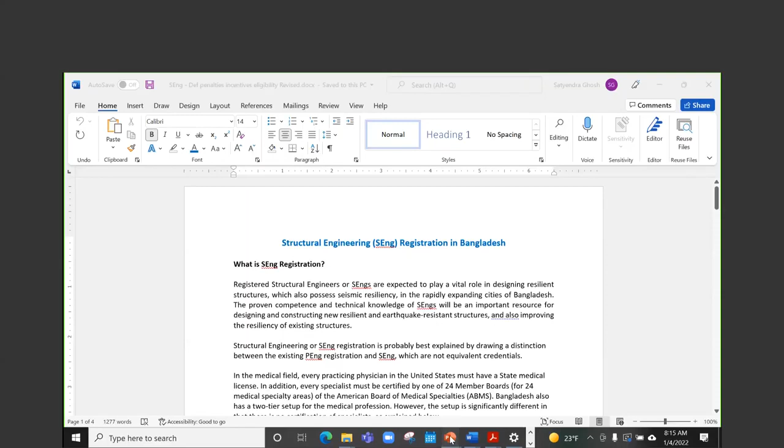So we have a two-part presentation today. The first part is just a general introduction to building codes. We thought that that would be an appropriate beginning to the whole program.

Dr. Ghosh, you're not on the slideshow mode, presenter mode. Oh yeah, okay.

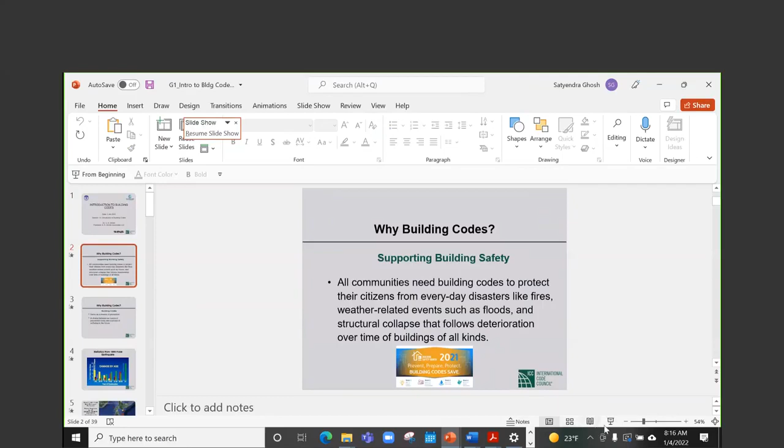Yeah. The first question is, we are spending a whole lot of resources and effort in trying to get BNBC 2020 implemented first and then enforced. But why? What is the importance of building codes? Why building codes? So this is very basic. All communities need building codes to protect their citizens from everyday disasters like fires, weather-related events such as floods, and structural collapse that follows deterioration over time of buildings of all kinds.

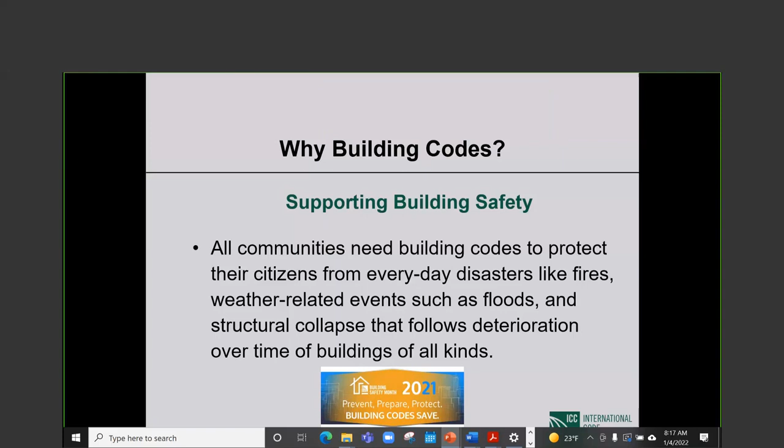Okay, so protect citizens from everyday disasters, protect citizens from disasters that happen once in a while, like floods, and age-related deterioration ultimately will destroy any structure. And to the extent that we can take steps to preserve structures to prolong their life, that also belongs in building codes. Building codes serve as a means of prevention. In a very basic sense, building codes prescribe preventive measures to keep bad things from happening. It provides us with a choice between an ounce of prevention today and a pound of suffering in the future.

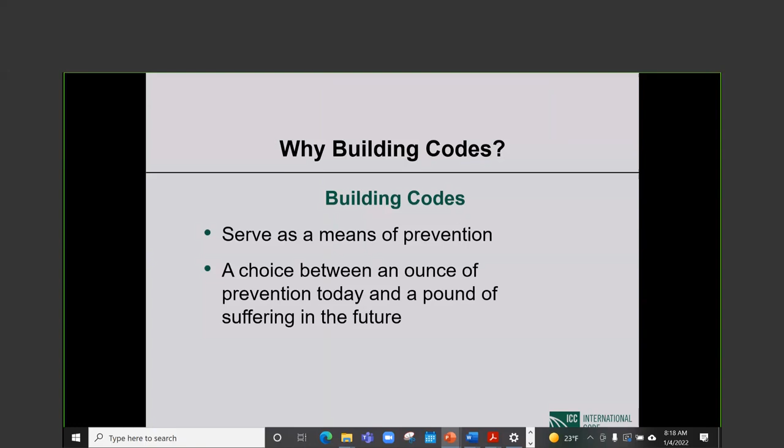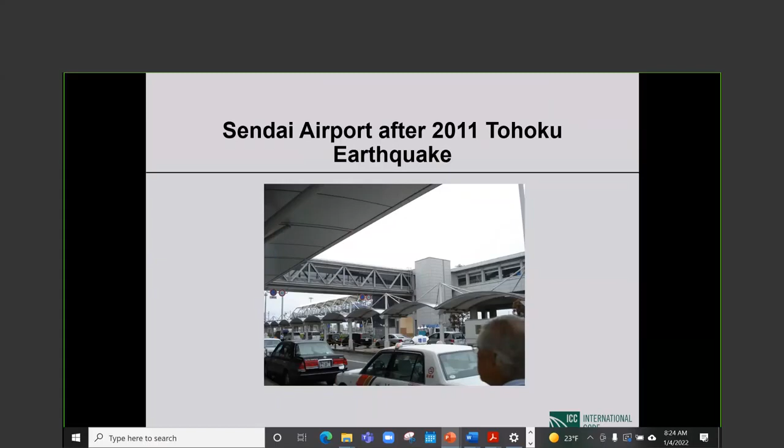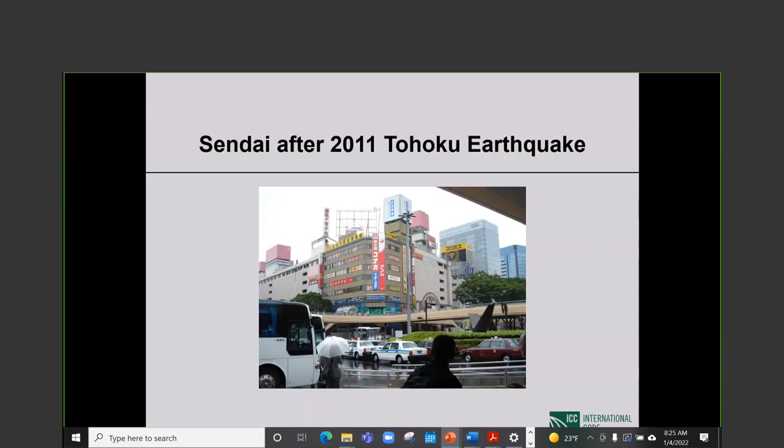It was not damage free, but considering the magnitude of the earthquake, the damage was very light indeed. When we came out of the airport waiting to be picked up, this is what the city looked like. You look at the traffic. There was essentially no sign of an earthquake having taken place just 3 or 4 weeks before. If you looked hard, yeah, there were signs, but there was basically not a whole lot to see. So I'm not saying that there was no damage, but if you drove around the city, you might not see a whole lot until somebody pointed things out to you. And then you did see earthquake damage.

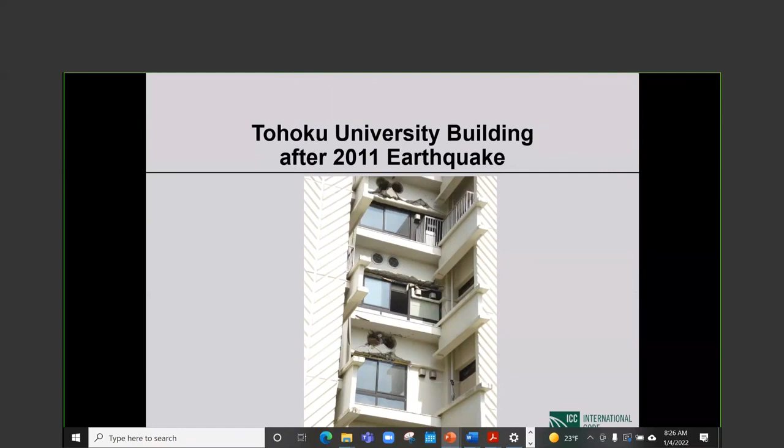Now, we were taken to the campus of Tohoku University just outside of Sendai, and many of the university buildings were old. This is one of them. These are shear walls that are coupled, as you will see in the next picture. These coupling beams between the shear walls had openings for some reason. I do not know why. And those suffered pretty much as expected, very major, very substantive damage.

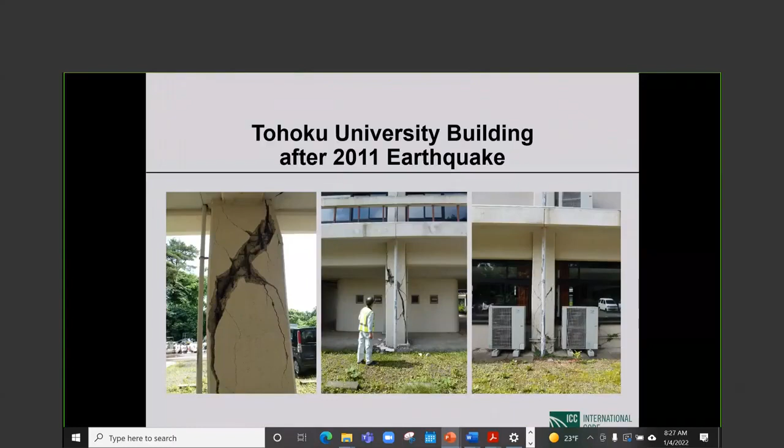So in this older building, there was plenty of damage to be seen, but as I mentioned, buildings designed and built by the later codes did incredibly better.

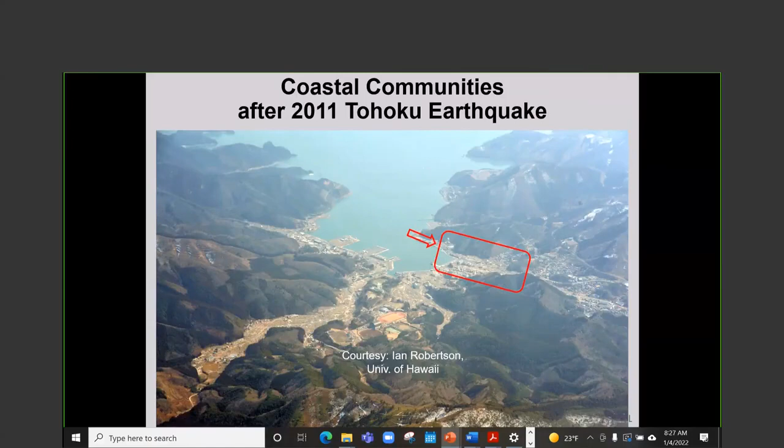The tsunami was a totally different story. All the coastal communities were fishing villages or fishing towns, and this is one of them. I don't remember the name now, Onagawa, something like that. You went to any of these places, and we went to many. It really is very depressing even to watch. All you saw was an occasional concrete building still standing up. When I say building, it is the skeleton of the building. Everything else is gone.

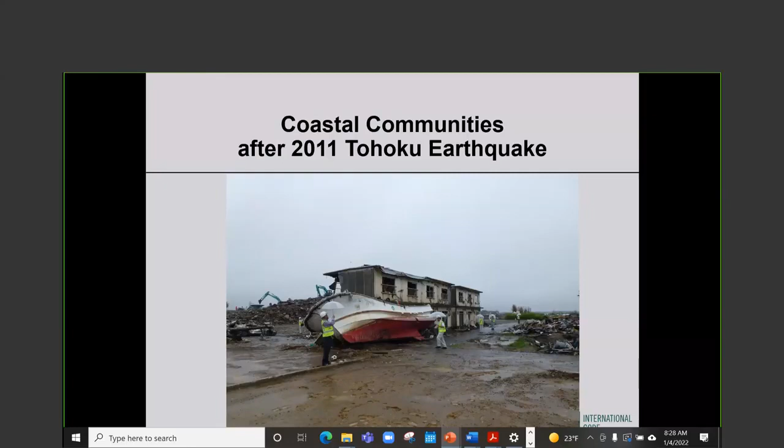People's possessions are all over the place. Children's shoes, family photographs, clothes. Typically they were collected in heaps, and other than some workers, there was no one around. It was total, complete devastation. In stark contrast with what happened as a direct result of the earthquake. So tsunami is a different story. We will not go into that today.

But my point in showing you everything so far was that Japanese building codes are technically sound. Much more importantly, they are very strictly enforced, and as a result of that, I would say all post-1981 structures, particularly post-1991 structures, have performed very, very satisfactorily in recent Japanese earthquakes.

Earthquake threat is not taken seriously in Bangladesh, at least by the public, although the World Bank seems to be very aware that it exists and that it may cause very, very serious problems. And it is true. I think many of you in Dhaka felt an earthquake about a month ago, this particular earthquake of magnitude 6.2 that originated outside of Bangladesh in Burma.

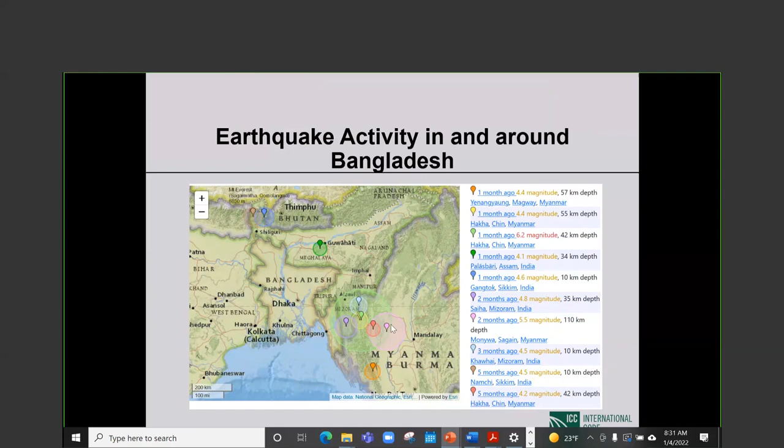and the epicenter is far enough away, at least from Dhaka, not from the border of Bangladesh, but a larger earthquake closer in, you can easily appreciate, might cause much more severe consequences. Earthquakes are natural disasters. The disaster that really has haunted the public in Dhaka and in Bangladesh is the man-made hazard of fires.

I will mention only two: the Chawkbazar fire of 20th of February, 2019 was the year. This is what happened. A fire, and much of these things should not happen. That's the point. A fire started as a result of a road accident of all things between a pickup van and a private car. After the collision, a gas cylinder stored in the private car exploded.

The first place the flames hit was a chemical warehouse on the ground floor of a 5-story building, and the flames quickly spread through 4 other buildings, including a community center where a wedding party was on. The fire left at least 80 people dead and 50 others injured. So imagine this is a chemical warehouse on the ground floor of a building where people live in a congested neighborhood. This definitely is not permitted by any code.

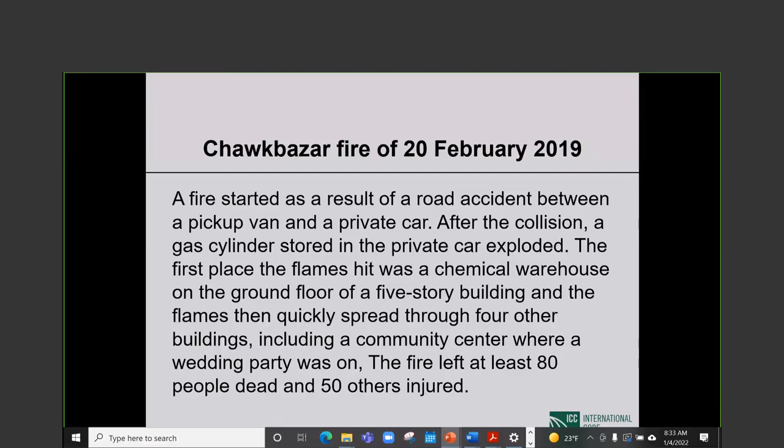This should have been detected by enforcement personnel and totally gotten rid of. Obviously, that was not the case, and people died. Dying is kind of final. What also happens is people get injured and people become homeless. There are endless dire consequences to deal with by the families and by the authorities, and it's just a tragedy all around.

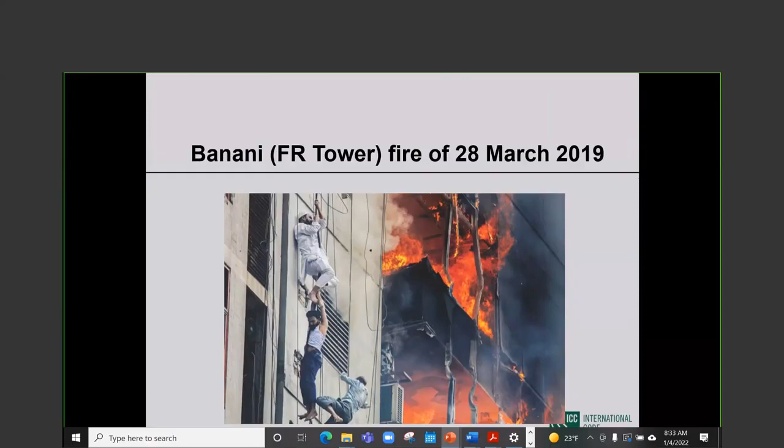The more recent, the FR Tower fire in Banani. This was March of 2019. The FR Tower, which was built before 2006, did not have a single fire protected staircase, and the main staircase was filled with choking smoke.

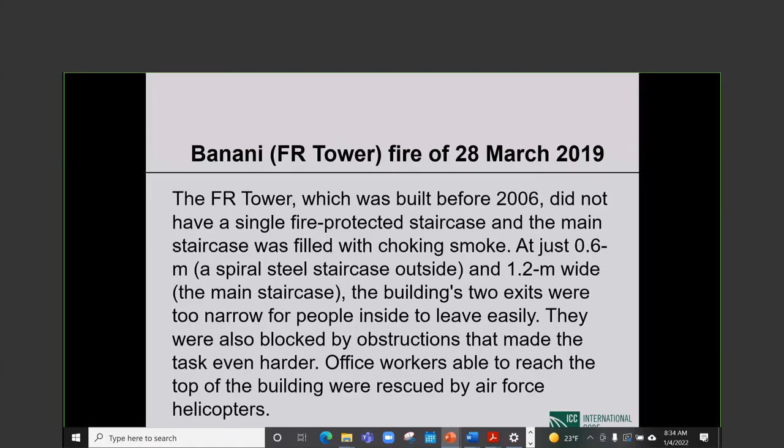At just 0.6 meter, the spiral staircase outside, and 1.2 meter wide, which was the main staircase inside, the building's 2 exits were too narrow for people inside to leave easily. They were also blocked by obstructions that made the task even harder. Office workers able to reach the top of the building were rescued by Air Force helicopters. This is now the telling thing.

According to news reports, the Bangladesh Fire Department had sent 2 letters in the prior 2 years highlighting the dangerous lack of safety in the building. Authorities knew the multi-story block was unsafe. The tower building, in fact, was supposed to be just 18 stories high, but was illegally extended to 23 floors. All of you know all these stories, and even the details, but the point is that code violations lead to major tragedies that are totally avoidable.

Okay, why building codes? Building codes are minimum requirements. That is extremely, extremely important. Building codes always give us minimum requirements established by society that ensure an acceptable level of safety of building occupants and protection of property. That is not the primary aim of a building code, but protection of property is considered in formulating building codes.

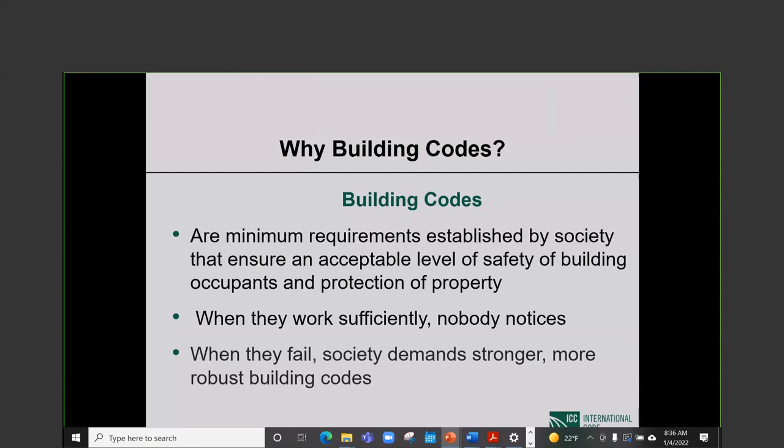And it is the same thing. When building codes work, nobody notices. When they fail, society demands stronger, more robust building codes. And then we react and sometimes overreact and do things that need to be scaled back.

Evolution of building codes. The first known building code was the Code of Hammurabi, roughly 2000 BC. Hammurabi not only had a building code, he had a comprehensive code on how life should be conducted in all its facets. Some of it is very interesting reading, just like the building code.

In the case of collapse of a defective building, the builder is to be put to death if the owner is killed by accident. So this is an eye for an eye, tooth for a tooth kind of thing. The builder's son will be put to death if the son of the owner loses his life. The interesting part to me is there's no mention of the daughter or wife, just the builder, the owner, the builder's son, and the owner's son. I guess in 2000 BC, that's how society was. But anyway, it's a very simple concept about buildings falling down, structural stability or failure, and the punishment is rather severe, as you can see.

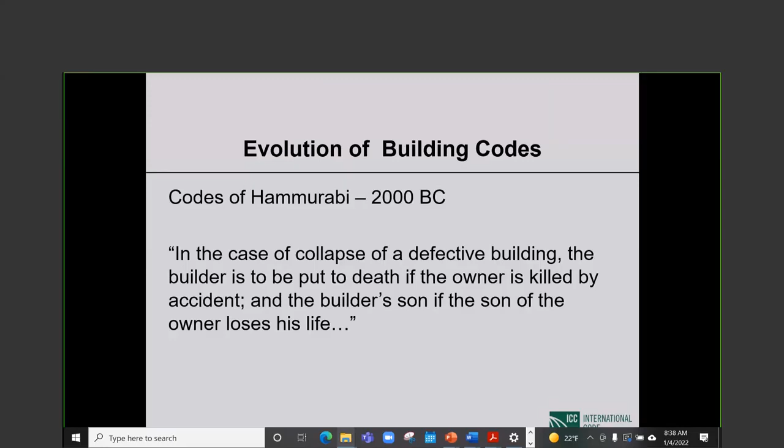Now this is, I think, a very important slide. We started with the Code of Hammurabi from Babylonian times. Structural safety was the only thing that used to be considered. I don't know how much later fire safety became a very significant issue to be dealt with in building codes, but it was not just structural safety, it was fire safety. Then it became the health, safety, and welfare of the occupants of the building.

If you breathe the inside air, are you going to get sick? That kind of consideration. Or even like you have steps that cannot be easily seen, then people are likely to fall. There's a health hazard that you have created inside the building. So that kind of consideration came into codes.

Later on, durability became a consideration that was also incorporated into codes. What is the expected design life of a structure? Is it 50 years? Is it 75 years? Is it 100 years? If it is 100 years, what are we supposed to do in the structure itself? Is it going to be all stainless steel reinforcement, or is that unnecessary? That sort of thing.

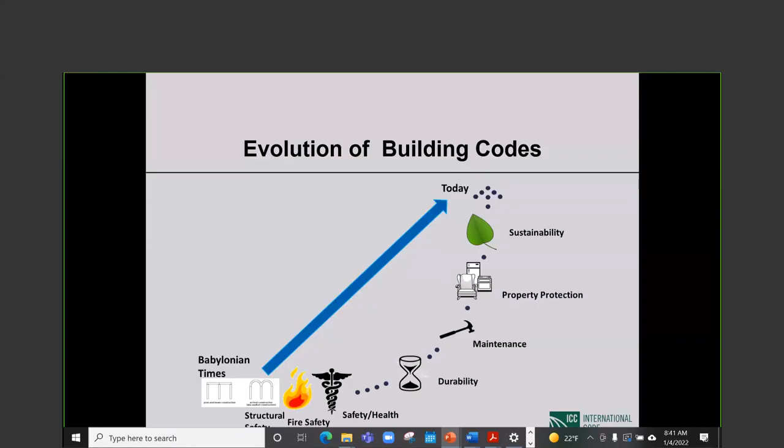And I expect that in the next 6 to 10 years, there will be major strides made, at least in the United States. So today, the role of building codes is more holistic, and they have a greater impact on communities beyond that of safety of the building occupants. There is focus on higher performance, need to preserve scarce resources, energy and water efficiency. Also, allowing for innovation in building design, materials, systems, and methods. That has been coming in gradually, and all of these things can be discussed at some length, but obviously this is not the occasion.

So continuing on the same vein, today the role of the building code is more holistic. Affordability in housing, to support availability, to support affordability, the so-called low-cost housing, even that has come into some codes. How to make livable structures at lower cost - can the code do something to facilitate that? Then there's community needs for greater resiliency, which I mentioned already.

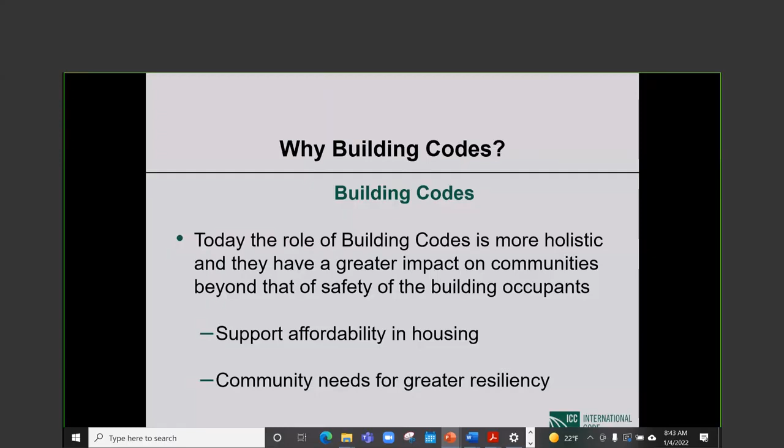Now, benefits of building codes. A building code provides safety and security for our loved ones. That's extremely, extremely important. In our S9 project, code enforcement, building code enforcement, we have come up with audiovisual material. Our consultant, Malay Chaki, a very talented man, has come up with a short movie where this safety of occupants is emphasized in a very nice way. I hope that you will have an opportunity to watch this short movie. So, safety and security for our loved ones.

A building code protects one of our greatest financial assets. One's home is a major financial asset for most people, and the building code protects it, provides more resilient communities, and helps preserve a country's building stock. I think these are obvious benefits.

Very importantly, a building code is not and cannot be a static document. It needs to be periodically updated in view of society's changing needs and values. New technology is always developing around us, and we need to take advantage and adjust. New research is showing us better, more cost-effective ways of doing things, and those need to be incorporated into codes.

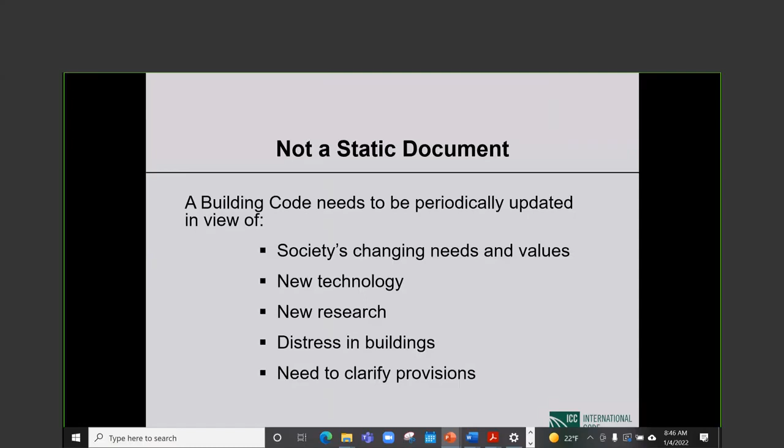Take ACI 318 for concrete design and construction. I cannot tell you how many times I have read many of the provisions there, and even now, when I read something, I may be confused. Clarity is very difficult to achieve in written language, particularly if the language is meant to be enforced. This last item is not trivial at all. A code provision, because it is meant to be enforced and has legal mandate behind it, has to be as clearly written as possible, has to be unambiguous to the extent possible, and that requires constant effort.

The next things are also extremely important. A building code applies to new buildings - this is always the case in every country of the world - and not to existing buildings. A new code edition becomes effective on a certain date; from that date on, all applications for construction permits must be for buildings complying with the new code edition. When a new code edition goes into effect, existing buildings need not be evaluated or modified in any way.

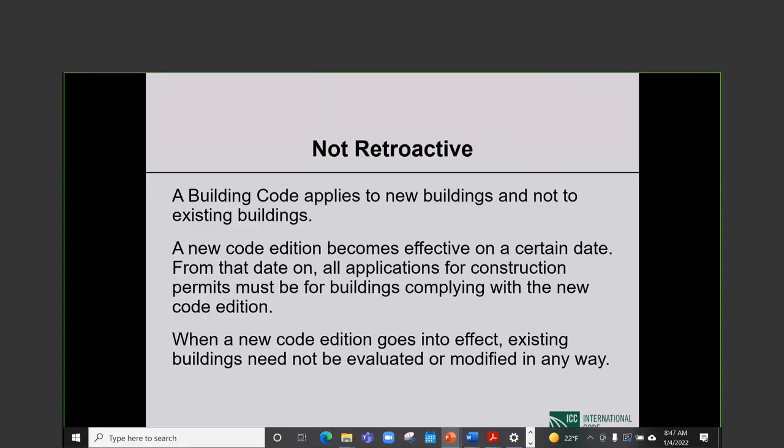This is very important: a new code applies to an existing building or part of an existing building only if the existing building is modified in some way - it is added to, it is altered, and so forth. If addition or alteration is made to an existing building, depending upon the extent of it, the addition, the altered portion, or the entire building may have to comply with the code in effect at the time a permit for such addition or alteration is applied for.

Everything said here is extremely important. A new code does not apply to an existing building. Having said that, if an addition or alteration is made to an existing building, depending upon the extent of the addition or alteration, the addition itself, the altered portion, or, if the addition or alteration is major, the entire altered building may have to comply with the code in effect at the time the permit for such addition or alteration is applied for.

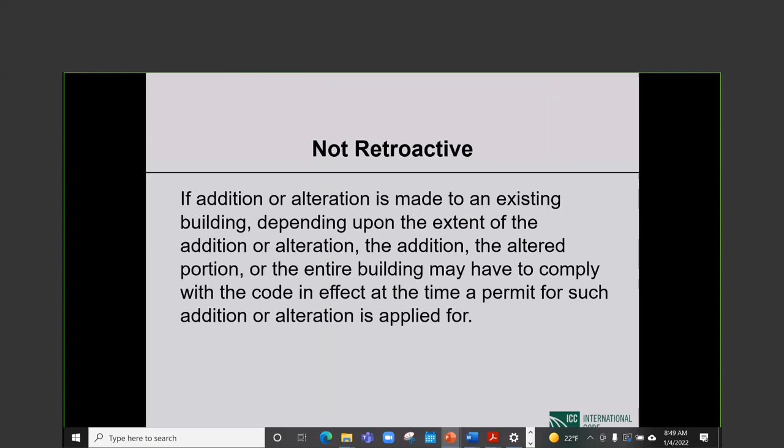These are commonly called triggers. How, when is an addition so large that the entire building, including the addition, has to comply with the new code? These are typically referred to as triggers, and that goes into significant other territory that is not our subject today.

So, minimum requirements - we talked about this earlier, this is a repeat. A building code provides minimum requirements. A designer may, and indeed should, go above or beyond the code - follow more stringent requirements - if in his or her judgment the added stringency is needed for safety and/or performance. This is extremely important. If in the engineer's judgment he should go beyond the minimum code, this is exactly what he's supposed to do. He is the engineer; the code is the minimum. What should be done to the structure should be decided upon by the professional, not that the code minimum is not always the right answer.

Then I title this "More is not necessarily better." I think all of you need to keep this in mind for all time to come. An over-reinforced concrete member performs much worse than an under-reinforced member in an overload situation. I have seen so many places, because reinforcing steel is more expensive than the concrete...

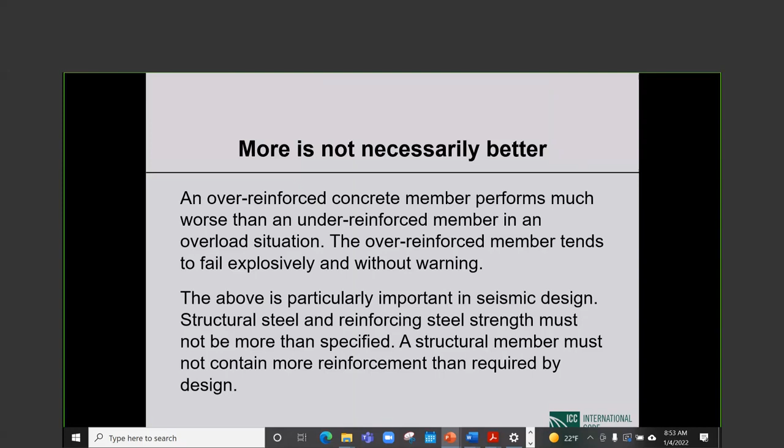Structural steel and reinforcing steel strength must not be more than specified. You specify grade 60 steel, you cannot just replace that with grade 75 because it is higher strength, so supposedly better - that will cause significant problems. A structural member must not contain more reinforcement than required by design. All of these I could elaborate on, and there will be occasions when I will do that in this training program. But please do keep in mind, more is not necessarily better, and that is particularly true in earthquake situations.

The act of putting something into effect, that is implementation. What is enforcement? Enforcement is making sure that rules are followed, that violations are rectified, that violators are penalized or punished. Implementation and enforcement are not interchangeable terms.

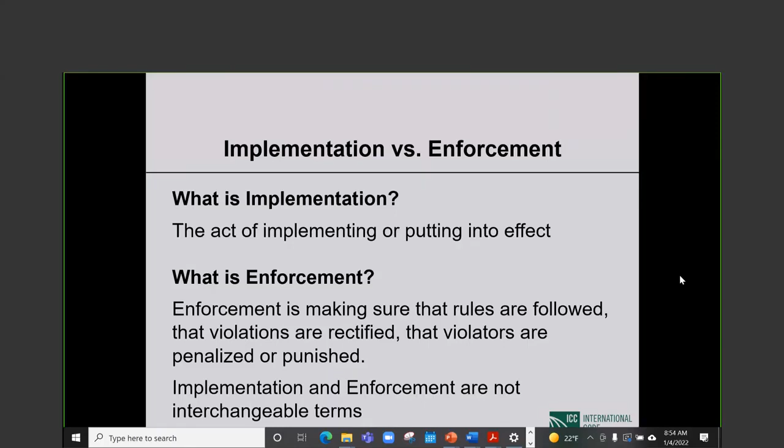Now, BNBC 2020, which is our code today, the gazetting of that document after a long wait happened on 18th of February... it should be 2021, last year. I don't know, that's a major mistake. I'm sure I wrote it myself. But...

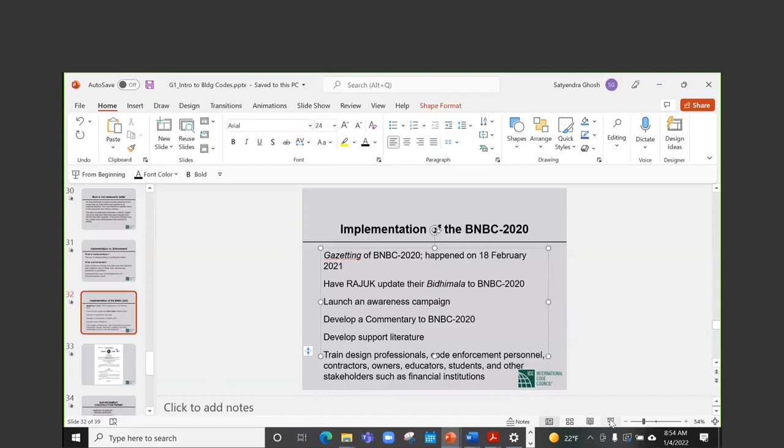So to implement this document, Rajuk will need to update their Bidhimala to BNBC 2020, which is underway, I'm happy to say. I think I know that progress has been made, although the effort has not been completed.

Launch an awareness campaign. We have various things going on. We have not emphasized the new edition versus the old edition kind of thing, which for professionals is important. This is something we probably should still think about.

From the beginning, we have felt that a commentary to BNBC 2020 is an absolute necessity. Professionals have told us so, and hopefully, as part of phase 2 of this URP Rajuk part, we will get to do that. Develop support literature, how to design using the building code.

That is the role of support literature. It is not commentary. It tells you how to use the code in designing and constructing structures. That is needed. And then training of professionals at all levels. So all those are parts of implementation.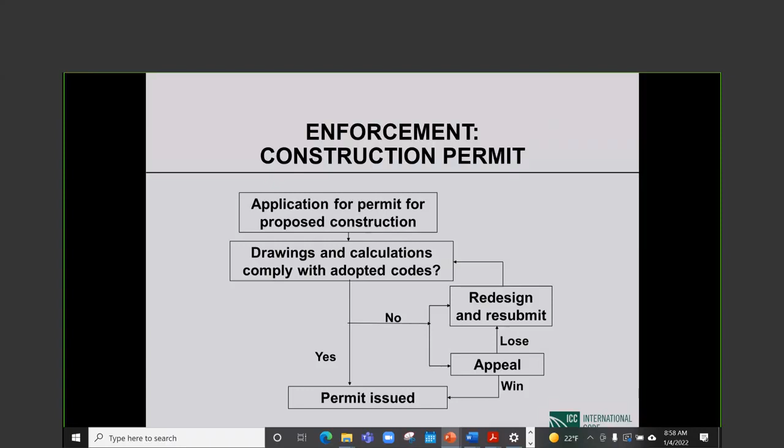This part of enforcement depends on the ability of the jurisdiction to do a proper plan check. I do want to emphasize that.

Now, we found that there is no fire safety plan review for residential buildings up to 6 stories in height in Bangladesh. Residential buildings up to 6 stories in height may have 500 people in one building sleeping at night. No fire safety plan review for those buildings. Not even indirect requirement to meet BNBC fire safety requirements. This we thought was a so-called gaping hole.

Second part of enforcement, we talked about design. Now you have a permit, so now it is construction. Construction has to be inspected. The inspectors have to make sure that the construction is in accordance with code requirements.

If that is so, then the inspector will so declare and the applicant will get what is called a certificate of occupancy. Then he can go ahead and use the building for whatever purpose the building was erected.

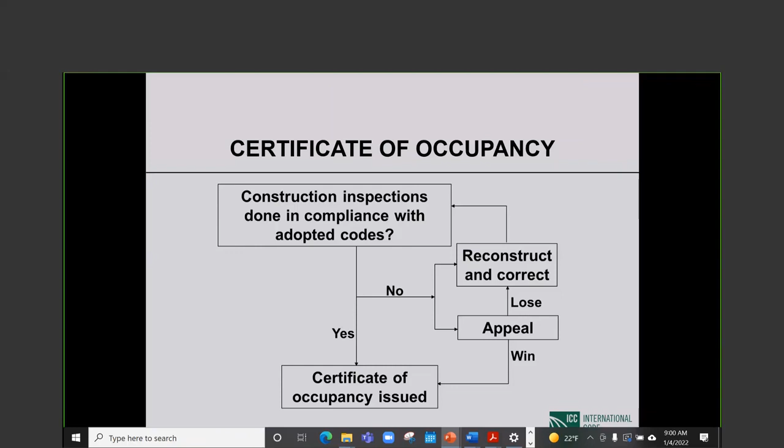If, however, the inspectors detect that there are violations of the code, then a certificate of occupancy will be denied, and then they will have to rectify all the problems that have been found and go back to the jurisdiction and get a certificate of occupancy. So this inspection is also a very integral part of code enforcement.

We found that there is no fire safety inspection for residential buildings up to 6 stories in height in Bangladesh, or at least in Rajuk jurisdiction. So we have made a whole lot of recommendations in our enforcement program report for Project S9. One volume of this 4-volume report has the recommendations only.

I think the recommendations are written in understandable terms, and two of the major recommendations concern plan review and inspection of structures. In both cases we have said in view of Rajuk's limited manpower and resources, third-party plan checkers and third-party inspectors should be employed to enhance the process. The third-party plan checkers and inspectors will be an extension of Rajuk. They will have no power of their own that is not delegated by Rajuk.

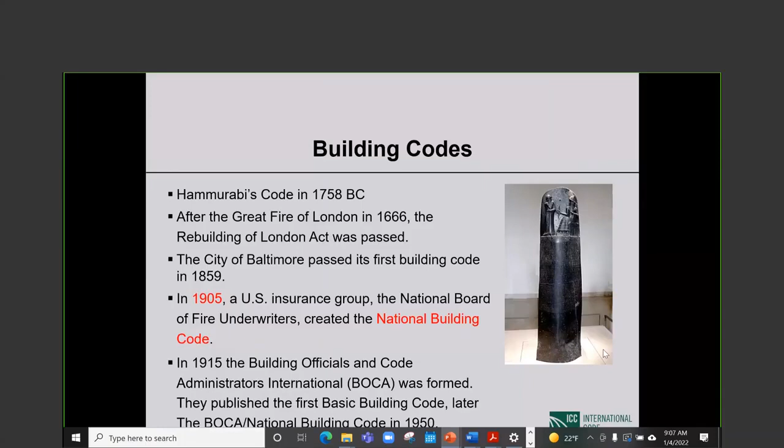They published the first so-called Basic Building Code in 1950, and this Basic Building Code became the BOCA National Building Code starting somewhere in the 80s after the original National Building Code died. So, the National Building Code issued by the National Board of Fire Underwriters was discontinued. BOCA took up that name, National Building Code, but to distinguish their code from the original, they started calling it BOCA/National Building Code. And that's how it was known until its last edition dated 1999.

The second model code group, International Conference of Building Officials, was founded in 1922. So the first one in 15, second in 22. They published the Uniform Building Code in 1927. That was the code adopted by roughly the western half of the United States. And because the seismic design provisions of this code were supposed to be kind of state of the art, this code had very significant worldwide influence. I should say continues to have.

There are places in the world where they still swear by it. You go to Iran, that's pretty much the story today. With all the fighting with the US and so forth, the code that they are wedded to is the Uniform Building Code.

So the BOCA building code was adopted roughly in the northeastern quarter of the country. The Uniform Building Code in the western half of the country. Then there was a third model code group, the youngest one, formed in 1940, called the Southern Building Code Congress International. And they issued their first code called the Standard Building Code in 1945.

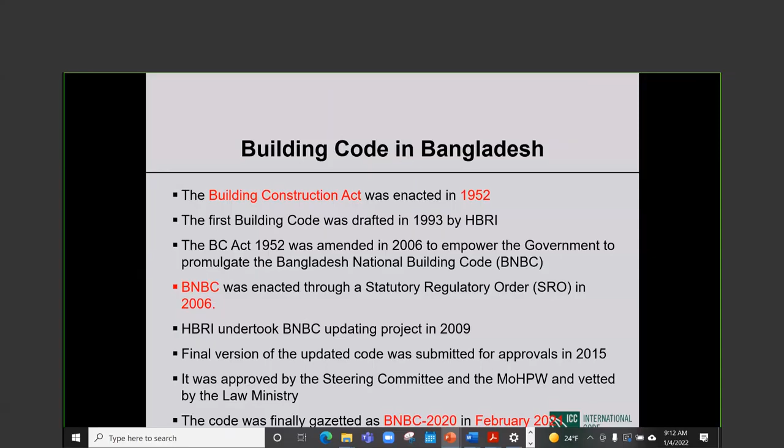Be that as it may, so the 2020 edition is the second edition of the Bangladesh National Building Code, gazetted less than a year ago. At the same time, this is the only time I will throw this in. This code, because it was started in 2009, is already outdated in many ways and badly needs updating in certain areas, which effort should get underway hopefully soon.

The purpose of the BNBC is to establish minimum standards for design, construction, quality of materials, use and occupancy, location and maintenance of all buildings within Bangladesh in order to safeguard life, limb, health, property, and public welfare.

Building code is not meant for the general public. This is important. A building code is not printed for just anybody to read. Okay, this is not something you take to bed to read before sleep comes to you. It's not that kind of a document. Building code is written for professionals, and it's like law books or medical books. Unless you have a certain background, it will not mean much to you, and that needs to be kept in mind. Okay, so the building code is written for professionals with a certain background.

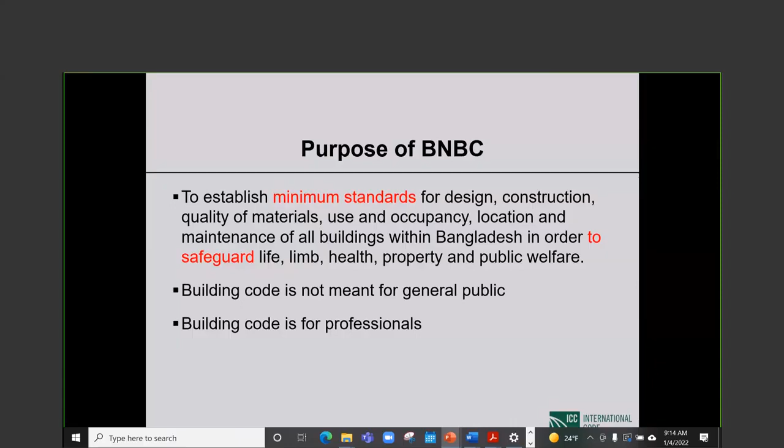Definition of building: any permanent or semi-permanent structure which is constructed or erected for human habitation or for any other purpose, and includes but is not limited to the foundation, plinth, walls, floors, roofs, stairs, chimneys, fixed platform, veranda, balcony, cornice, projections, extensions, annexes, etc.

A few of Dr. Rakib's slides I have modified. This one I have not modified. This is the exact language he had there. It is probably taken from BNBC. Anyway, building also includes the sanitary, plumbing, electrical, HVAC, appurtenances, and all other building service installations which are constructed or erected as an integral part of the structure. So all of that is building.

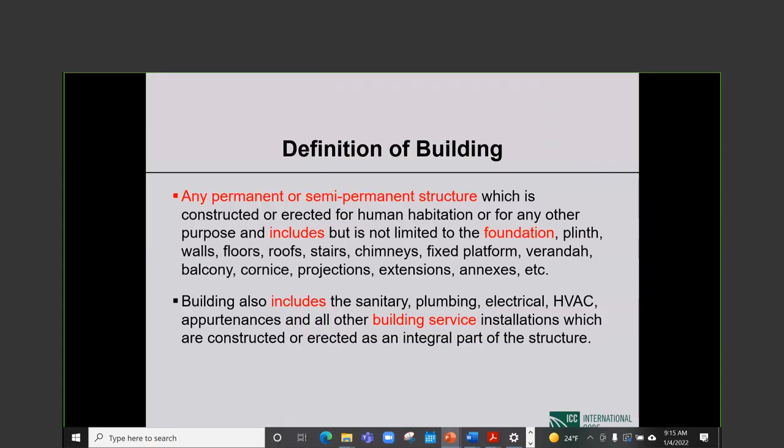Now here we make a distinction between buildings and non-building structures that I will not go into right now. So this definition of building will pretty much include non-building structures as I read it.

BNBC, I think all of you know, is in 3 volumes. Volume 1 has parts 1 through 5. Part 1 is scope and definition. Part 2, administration and enforcement. Very, very important part of the code, not to be minimized. People see administration and enforcement, they move on, but that is not the right thing to do.

So this Part 2 really needs to be read and understood. Part 3, general building requirements, control and regulation. Part 4, very importantly, is fire protection. Part 5, building materials as opposed to design using building materials.

Okay, building materials themselves. Volume 2, all of Volume 2 is just Part 6, structural design. I should not say just Part 6. That is a huge part that talks about structural design in all the materials that are allowed to be used in buildings.

Then Volume 3 has Parts 7, 8, 9, and 10. 7 is construction practices and safety. Part 8 is building services that we were talking about, electrical, mechanical, energy, all of that. Part 9, very importantly, addition, alteration to, and change of use of existing buildings. And Part 10 are signs and outdoor display.

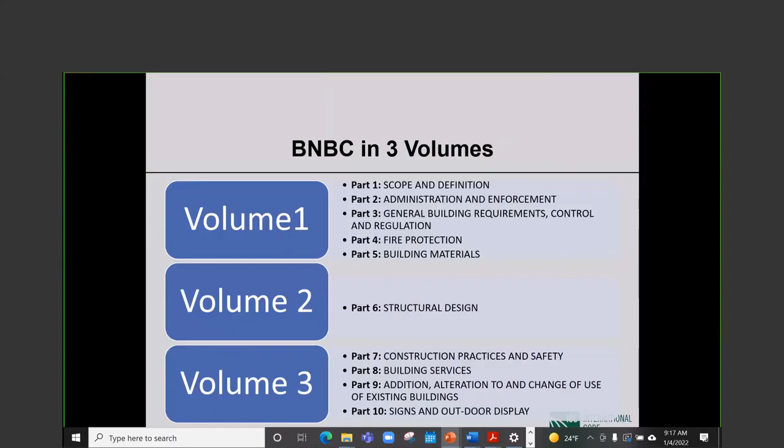Yeah, in US code, signs and outdoor display are not given this kind of full treatment. I looked into it at one time. I believe that this is modeled after the Indian code, and it does make sense. But this part is kind of different from what you will see in US codes.

Okay, Part 2, administration and enforcement. The part that I said is quite important. Part 2 has 3 chapters: purpose and applicability, establishment of authority, etc. This stuff is important. Permit and inspection.

Under establishment of authority, BNBC says the government may establish the Bangladesh Building Regulatory Authority, BBRA. That has not happened, but the code gives provision for this. The authority shall consist of the following 5 members, which we have not gone into in the slide. The authority, BBRA, shall designate specific geographical jurisdiction as the office of the building official. So Rajuk could be, for instance, the office of the building official.

The building official shall exercise his power and responsibilities through a building construction committee. That's how it works at Rajuk and the other authorities that we have been familiar with. The authority may constitute a board of appeal to hear and decide appeals of orders, decisions, or determinations made by the building officials.

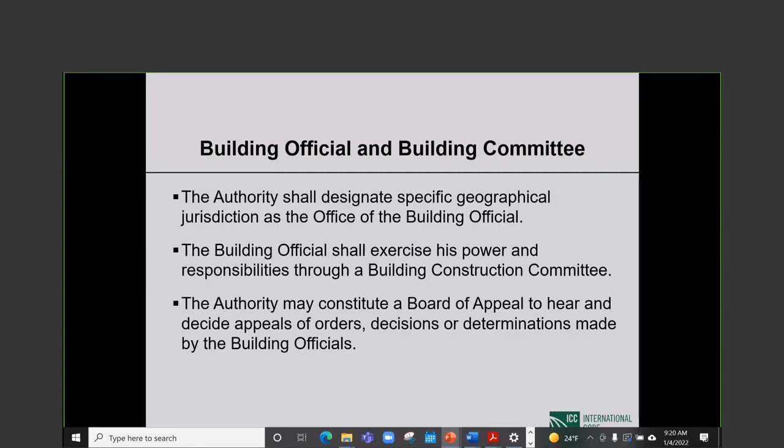Jurisdiction of building officials. Remember, the language was the authority shall designate specific geographical jurisdiction as the office of the building official. So this is where this list comes in. Areas under the master plan of Rajuk, the authority is Rajuk. Areas under the master plan of Chittagong Development Authority, the Chittagong Development Authority is the authority. Similarly with Rajshahi Development Authority, with Khulna Development Authority, areas under any development authority, the relevant development authority is the authority, or that is the office of the building official.

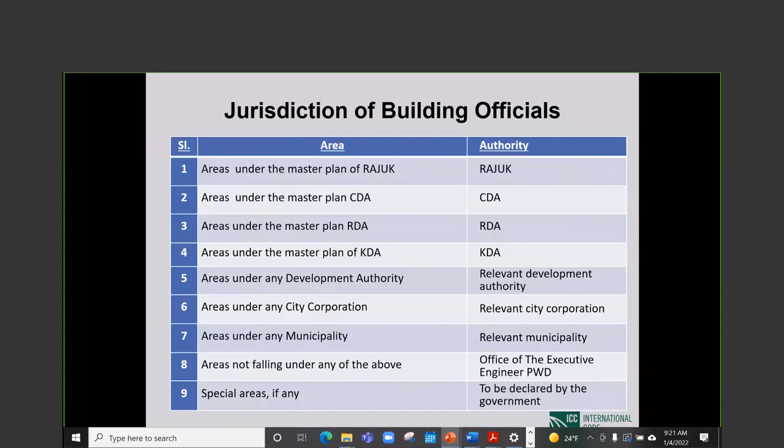Areas under any city corporation, the authority is the city corporation. Areas under any municipality, the municipality is the jurisdiction. Areas not falling under any of the above, very importantly, office of the executive engineer of PWD is the authority. Okay, where there is no development authority, corporation, or municipality, the office of the executive engineer of PWD is the authority. Special areas, if any, to be declared, then the government decides case by case who the authority would be.

Types of permits and building categories. So first of all, the permits. There are a number of permits depending upon the structure that may have to be taken out. Land use certificate. Validity of that certificate is 24 months. You have to do something on the land within that period. Otherwise, the certificate lapses and you have to take out another one. Upon proper application, Rajuk is supposed to give it to you within 15 days.

Large and specialized project permit, validity 24 months, time that Rajuk has to process and issue it to you 45 days. Building permit, validity 36 months. So this permit without which you cannot construct is valid for 36 months. If you don't do anything in that time, then it lapses. And Rajuk has 45 days to process the application and issue the permit.

Occupancy certificate has perpetual validity, although I think it has to be renewed every 5 years. I believe that is the case, or maybe it is our proposal. So the time that Rajuk has to issue it is 15 days.

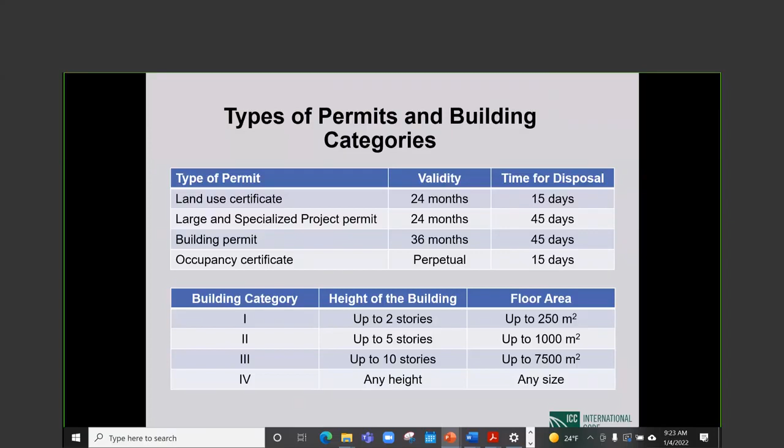Category 4. Okay. So then BNBC very importantly gives you this table where it spells out the professionals that can do certain things and how much experience that professional has to have. So if it is a survey, a diploma engineer can do the survey for category 1 buildings, 2 stories and 250 square meters. There are really no experience requirements for the professional. But if it is a category 2 building, the diploma engineer has to have 3 years experience. And for category 3 and 4, the 3 years remains unchanged.

Soil testing can be done by a civil engineer. For category 2 buildings, 2 years of experience, but for category 4 buildings, unlimited height, unlimited area, 5 years of experience. Structural design has to be done by a civil engineer, 2 years experience in the case of category 2 buildings, 4 years experience in the case of category 3 buildings, 8 years experience in the case of category 4 buildings. So you get the idea.

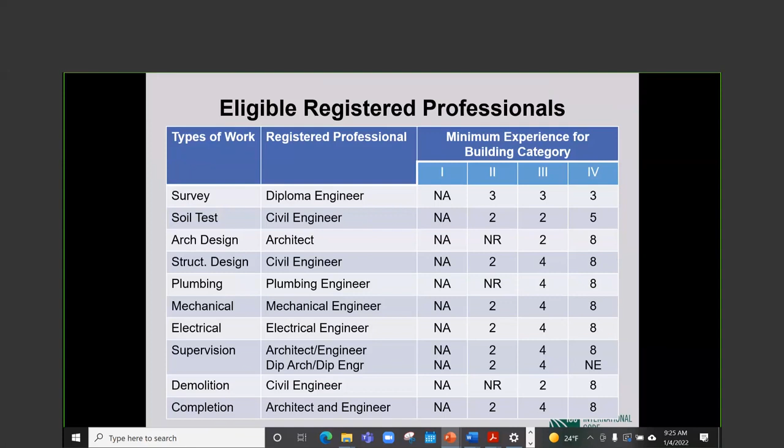This type of a table is definitely not in any US code, but I think this serves a very, very good purpose. Okay, so everything is spelled out, and the table number is not on the slide, but this is a table directly in BNBC 2020.

For many things, a building permit is not needed, mainly because they are really not buildings. Railways, national highways, national waterways, national gas grid, national power grid, major ports, airways and aerodromes, telecommunications, the towers and so forth, electronic broadcasting services, any other services which the government may declare to be essential to the community.

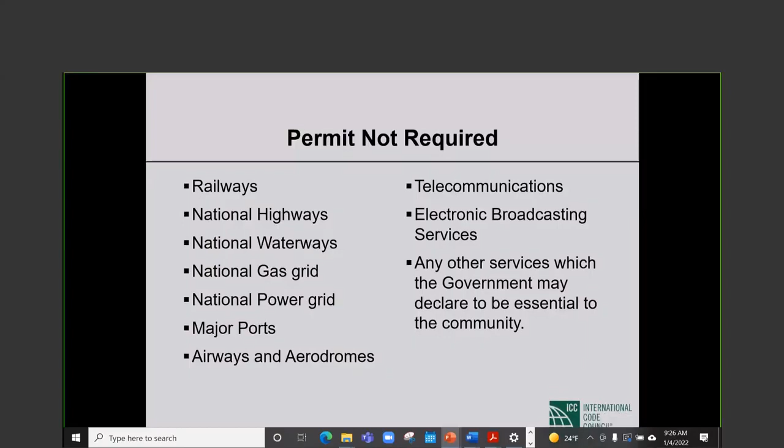Responsibilities of the owner. This is spelled out in BNBC. Some of this stuff is kind of important. The owner shall be responsible for carrying out the work in conformity with this code. Okay, that's the owner's responsibility. The owner is ultimately responsible for code compliance. It's not the people that the owner hires. Design, execution, and supervision work shall be carried out by authorized registered professionals. Owner shall allow the building official to enter the premises. This is required. This is his responsibility. The owner shall obtain permit as may be applicable. That again is owner's responsibility.

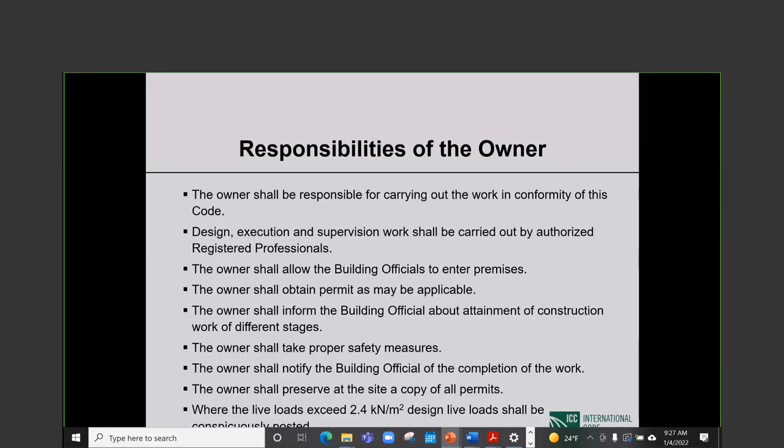The owner shall inform the building official about attainment of construction work at different stages, like stage by stage completion kind of thing. Should keep the building department apprised. The owner shall take proper safety measures, very, very important. The owner shall notify the building official of the completion of the work. The owner shall preserve at the site a copy of all permits. Where the live load exceeds 2.4 kilonewton per square meter, design live load shall be conspicuously posted. This is a code requirement. Heavy live loads.

Unsafe buildings. All buildings that constitute danger to public safety or public property shall be declared unsafe by the building official. In case the owner fails, neglects, or refuses to carry out the repair or improvement of an unsafe building, the building official shall cause the danger to be removed either by demolition or repair, the cost of which shall be borne by the owner. Okay, so these are pretty significant powers being given to the building official, as you notice. Now, this results in litigation and all kinds of things, but the building official does have the power.

If the building official determines that an unsafe building constitutes imminent danger, the building official shall at once cause such building to be rendered safe or removed. I think this kind of power given to the building official makes a lot of sense. This is public safety. At the same time, you know, this kind of determination is not easy, and these things tend to get messy. The building official may also get the adjacent structures vacated and protect the public by an appropriate fence.

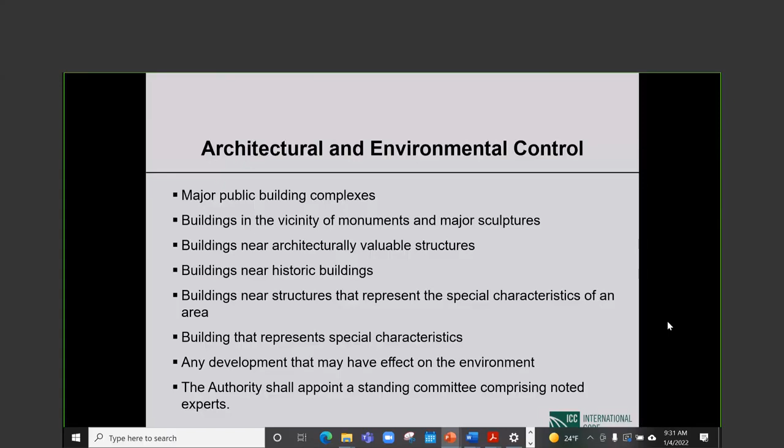Okay, we come to part 3, which is general building requirements, control, and regulation. Chapter 1 of part 3 is general building requirements. Chapter 2 of part 3 is classification of buildings based on occupancy. This tends to be very important for many things you need to do. Also, classification of building construction type based on fire resistance, and then energy efficiency and sustainability.

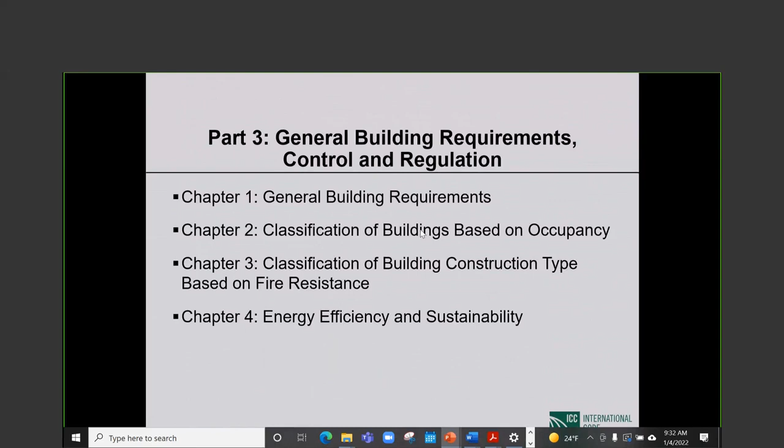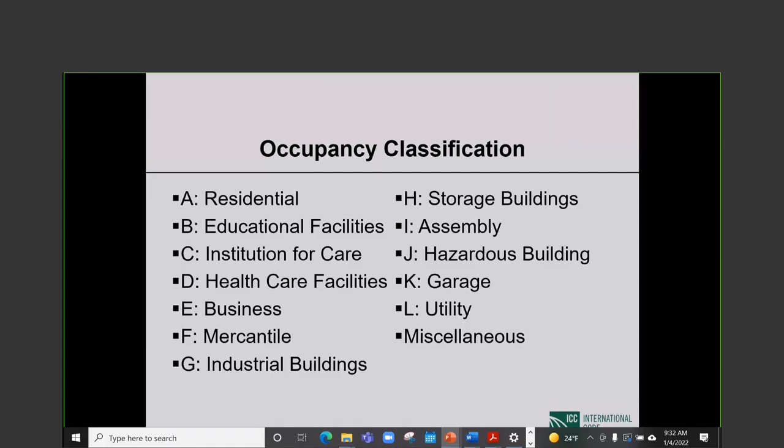So classification of buildings based on occupancy, that's what we are talking about here. So residential buildings, that would be type A, educational buildings, institution for care, healthcare facilities, business occupancy, mercantile, industrial buildings, storage buildings, assembly buildings, hazardous buildings, garages, utility, miscellaneous. Okay, so those are the classifications based on occupancy, and depending upon what classification you have, you may be subject to different regulations in the code.

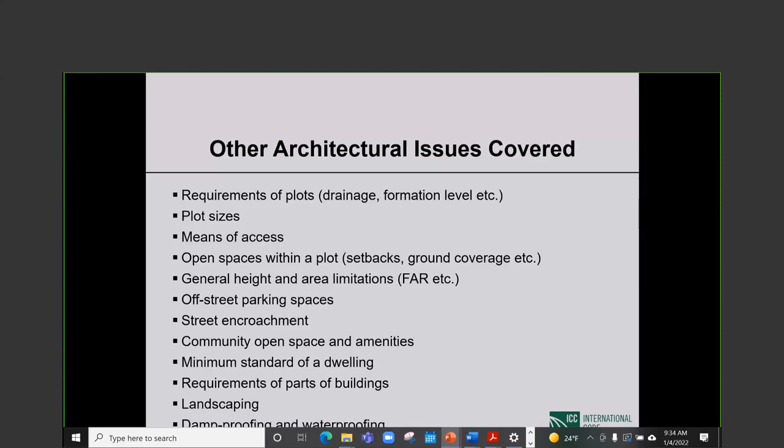Other architectural issues covered: requirements for plots, drainage, etc., plot sizes, means of access, open spaces within a plot, which would include setbacks, ground coverage, etc. General height and area limitations, the floor area ratio falls under that. Off-street parking spaces, street encroachment, community open space and amenities, minimum standard of a dwelling, requirements of parts of buildings, landscaping, damp proofing and waterproofing. Okay, all of that is covered in BNBC 2020, which is a pretty comprehensive document.

Energy efficiency and sustainability. All kinds of things are popping up all the time. So energy efficiency and sustainability. The scope includes: incorporate building concepts having a positive environmental impact and encourage sustainable construction practices, allowing efficiency and conservation of energy, water, and building materials, and to promote resource efficiency. It's kind of a complicated sentence, but it tells you quite a bit.

So incorporate building concepts having a positive environmental impact. That's understandable as it is. Encourage sustainable construction practices, allowing efficiency and conservation of energy, water, and building materials, and to promote resource efficiency. The efficiency may have been said one too many times, but you get the idea.

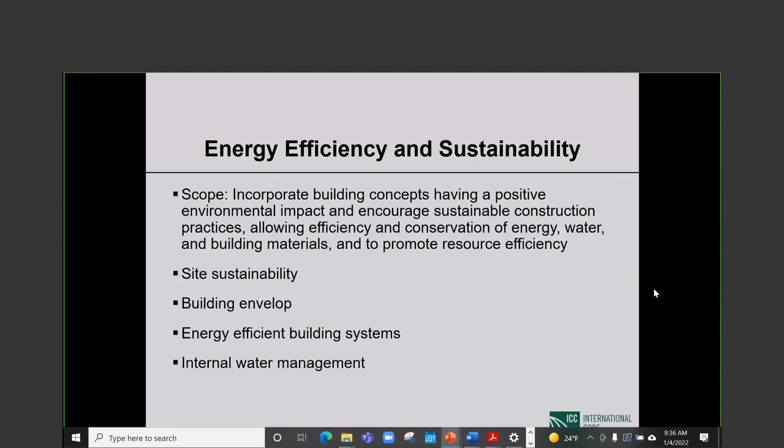Then site sustainability is covered in BNBC, building envelope. That is a huge subject. Building envelope has to keep the weather out. Water must not get in. All of these things are much easier said than done. Energy efficient building systems, internal water management. The list just gives you an idea of how many things are involved in a building.

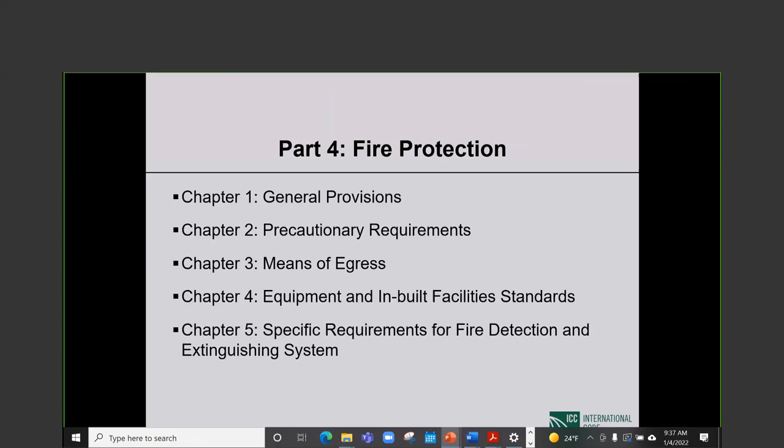So fire protection, Dr. Rakib didn't go into details in this slide set, but these are the topics covered. And some of these are huge topics, means of egress, for instance. Anyway, so in part 4, we have chapter 1, general provisions, chapter 2, precautionary requirements, chapter 3, means of egress, chapter 4, equipment and inbuilt facility standards, chapter 5, specific requirements for fire detection and extinguishing system. So pretty comprehensive requirements, although this may not be the most comprehensive if you look at codes of the United States and so forth.

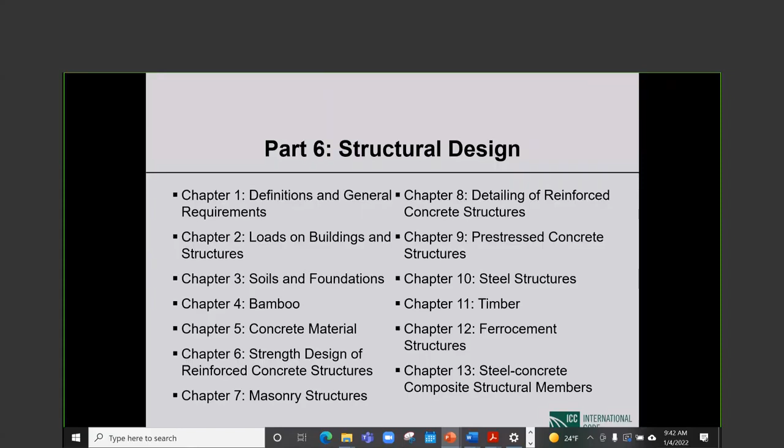This is extremely important stuff. In the US, there is a federal agency, OSHA, that takes care of some of this. Building code has the rest of it. In Bangladesh, the entire regulations are in BNBC. To what extent they are being enforced, I don't exactly know. We do not have a clear picture, I should say.

But anyway, these are all very important topics. Safety during construction, without which the workers are in trouble. This has been historically a problem in countries around the world. Okay, things have improved, but more improvements are always necessary.

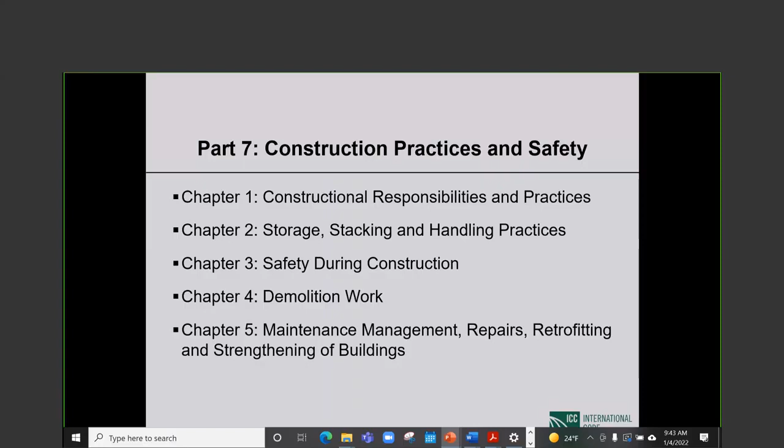Building services, part 8. This is a world unto itself, okay, which structural engineers know very little about. Electrical and electronic engineering services for buildings, air conditioning, heating, ventilation, building acoustics,

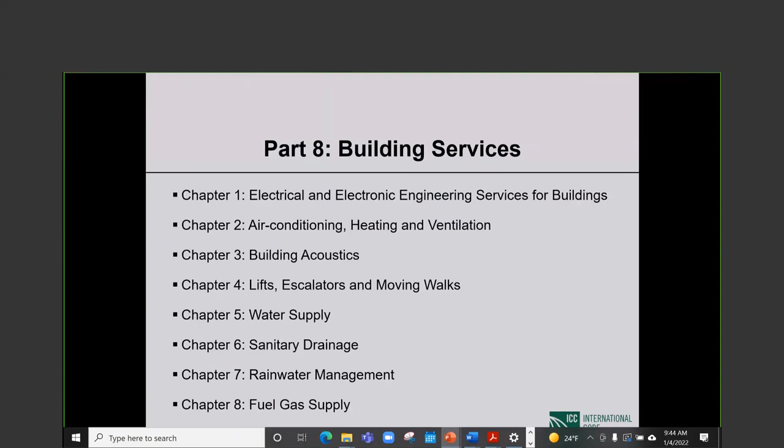lifts, escalators, moving walks, water supply, sanitary drainage, rainwater management, fuel gas supply, electrical building services, lighting. We are listing these topics because these are covered in the code. I hope you keep that in mind, that we have code provisions that will govern the installation of lighting.

So lighting, load estimation, fitting fixtures and accessories, wiring, substation and transformer, distribution system, switch and switchboards, overcurrent and short circuit protection, fire protection, alarm and emergency lighting, earthing, lightning protection, telecommunication, CCTV and access control system.

HVAC, this is heating, ventilation, and air conditioning. So there is planning requirements, air conditioning system design, air distribution system, air conditioning equipment, refrigerating equipment, ventilation system, energy conservation, inspection, testing, and commissioning, operation and maintenance.

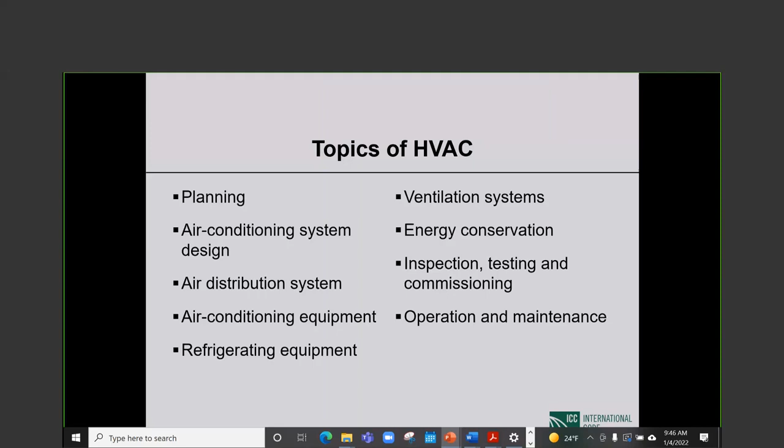I know that this kind of reading of a list is boring, but I hope that for a structural engineer or a civil engineer, this is in itself very good exposure to what the other professionals deal with—the electrical engineer, the mechanical engineer—all of whom have a role to play in the construction of a building. So this is what they're dealing with.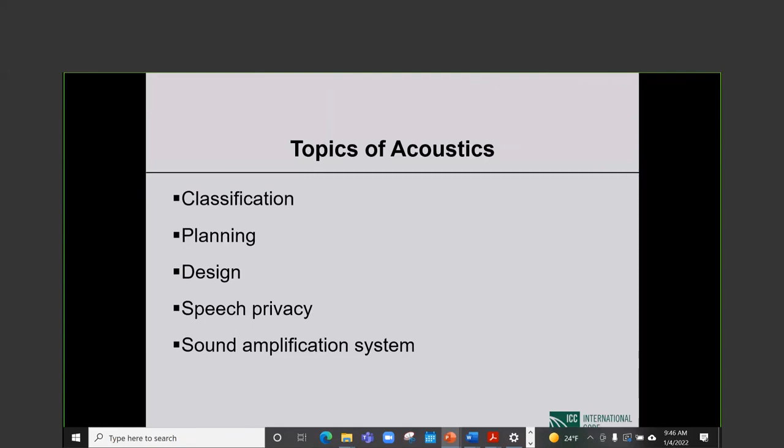Acoustics, depending upon the occupancy of the structure, this can be very important. Obviously, if a building is for performances by artists, acoustics is one of the most important design criteria. Anyway, so under this chapter: classification, planning, design, speech privacy, and sound amplification system.

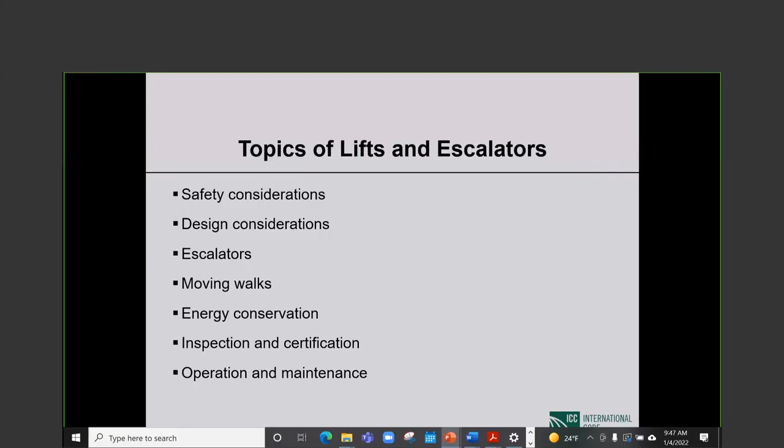Topics concerning lifts and escalators: safety considerations, design considerations, escalators, moving walks, energy conservation, inspection and certification, operation and maintenance. All of that is dealt with in the code.

Types of water supply. So there is permitting involved, licensing of plumbers, water supply requirements, estimation of demand load, water resources and quality, inspection and certification, water supply system, storage of water, design of distribution system, water distribution in tall buildings, which has its own challenges.

Obviously, you have to pump it up long distances. Hot water supply installation—I do not know how common it is in Bangladesh, but hot water is definitely needed. Anyhow, pipe work, cleaning and disinfection.

Sanitary drainage, again, planning is involved: licensing of plumbers, drainage and sanitation requirements, materials and appliances, design considerations, refuse chute system, basement floor drainage system, healthcare drainage system, inspection, testing, and completion certificate, and guide to maintenance.

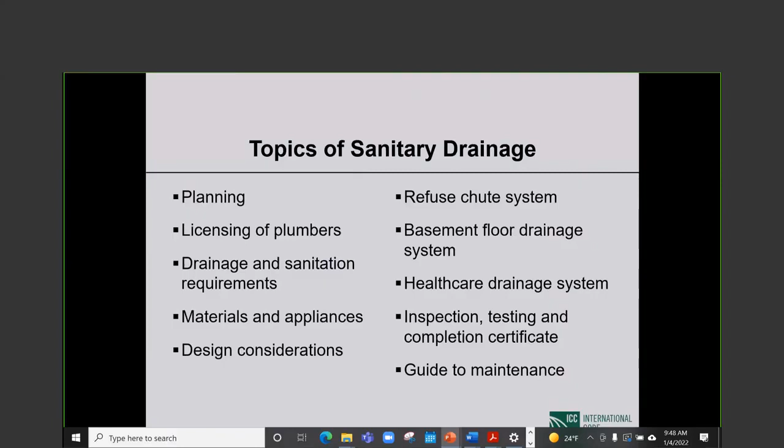The last number of slides simply gives you an idea of the scope of BNBC, how comprehensive a code it is, and the stuff that it deals with.

Rainwater harvesting, for instance, is becoming increasingly important for conservation of resources, and it is pretty remarkable that the code has specific provisions concerning that: rainwater harvesting requirements, rainwater harvesting planning, licensing of plumber, rooftop rainwater harvesting treated separately, artificial groundwater recharge, drainage and sanitation requirement, materials and appliances, construction, inspection, testing, completion certificate, and guide to maintenance.

And then fuel and gas supply: the gas piping installation, use of liquid petroleum gas, and installation of appliances.

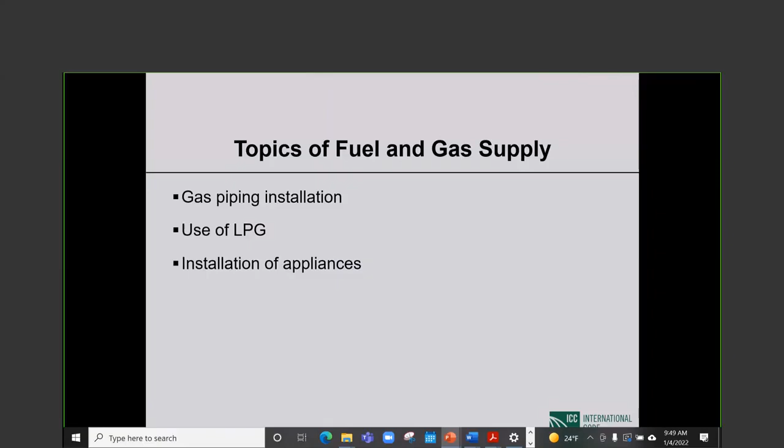Then the very important topics of alteration, addition to, and change of use of existing buildings. Not a lot is laid out on the slides, but please pay close attention—this is very, very important stuff.

Alteration, addition to, and change of use of existing buildings: Chapter 1 deals with applicability and implementation, Chapter 2 deals with evaluation and compliance, and Chapter 3 deals with, very interestingly, conservation. You don't find that topic in too many codes.

So, applicability of the provisions: no change in use shall be made without permission from the permitting authority. This is extremely, extremely important. You need a permit from the authority to do a change of use of your building—you cannot do it on your own.

No addition shall be made without permission from the permitting authority. First was change of use, second is addition. An existing building shall not be altered in such a manner that results in the building being less safe or less sanitary.

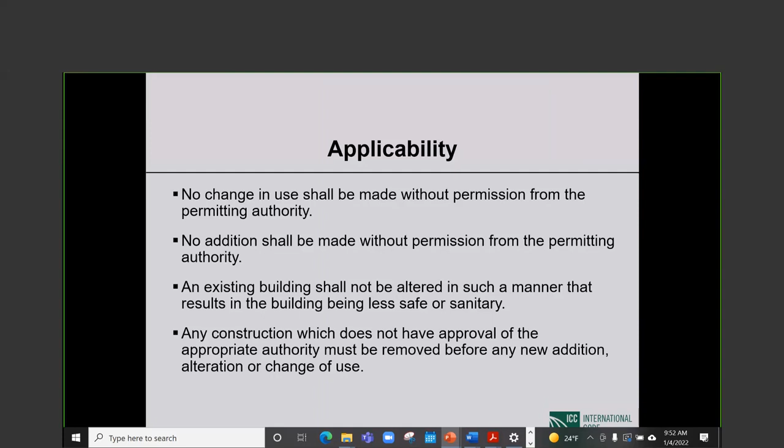Any construction which does not have approval of the appropriate authority must be removed before any new addition, alteration, or change of use. Everything said on this page I consider to be highly, highly important.

For the proposed works relating to alteration, addition to, and change of use, the owner of the building shall cause the existing buildings to be investigated and evaluated by competent professionals. This is extremely, extremely important—I could not overemphasize the importance of this evaluation.

The results of the investigation and evaluation shall be submitted to the building official. The building official shall determine whether the proposed additions, alterations, or change of use complies with the provisions specified in this code, meaning BNBC 2020.

Conservation, as I said, is not very common in codes, but BNBC has conservation in it. Conservation is the process of retention of existing buildings or groups of buildings, landscapes, etc., taking care not to alter or destroy character or detail.

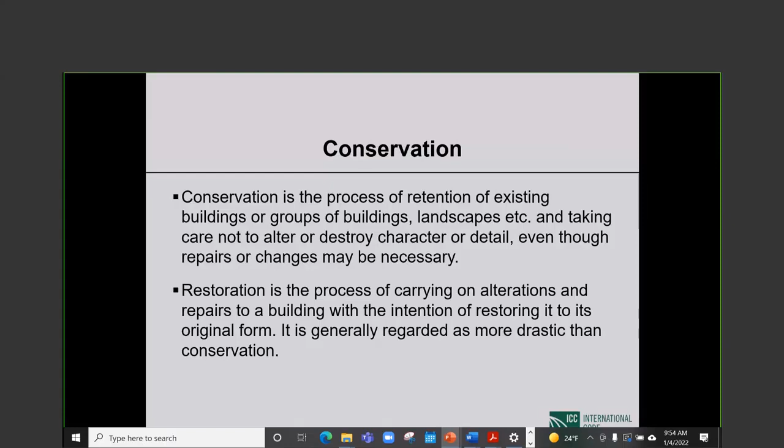Conservation, you don't try to do too much. Restoration is the process of carrying on alterations and repairs to a building with the intention of restoring it to its original form.

Guidelines to conservation: be reversible and repeatable. For the reversible part—say you need to paint a part of a building, you try to make the paint look as close as possible to the original paint. Now, how are you going to reverse it if it turns out more different than expected? But that's the idea: to the extent that you can reverse it, that is to be aimed for.

And repeatable, meaning you should be able to do the same thing—like another wall needs painting, you should be able to repeat what you did to the first wall. Not prejudice a future intervention is also kind of important: whatever you do, if more needs to be done to the structure at a future date, you should not make that difficult by your conservation measures.

Not hinder the possibility of later access to all evidence—evidence meaning what might have happened by way of deterioration, cracking, and so on. You shouldn't hide those things. Allow the maximum amount of existing material, and be harmonious in color, tone, texture, form, and scale. All that makes sense—that's conservation.

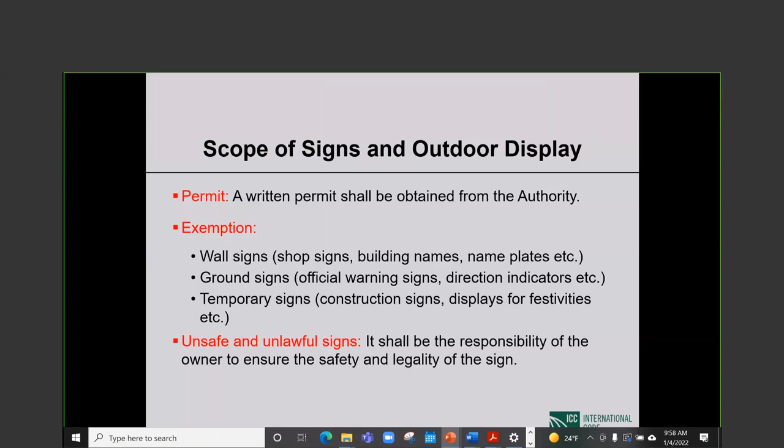Unsafe and unlawful signs—it shall be the responsibility of the owner to ensure the safety and legality of the sign. That probably goes without saying.

Restrictions on signs and outdoor displays: there may be restricted sign zones designated, and prohibition on advertisement—if there is prohibition, you obviously cannot violate that. Signs on highways and roads have restrictions on what you can and cannot do. Illuminated displays again have restrictions, as do location restrictions and projection over public property. And clearance from power lines, that is extremely, extremely important.

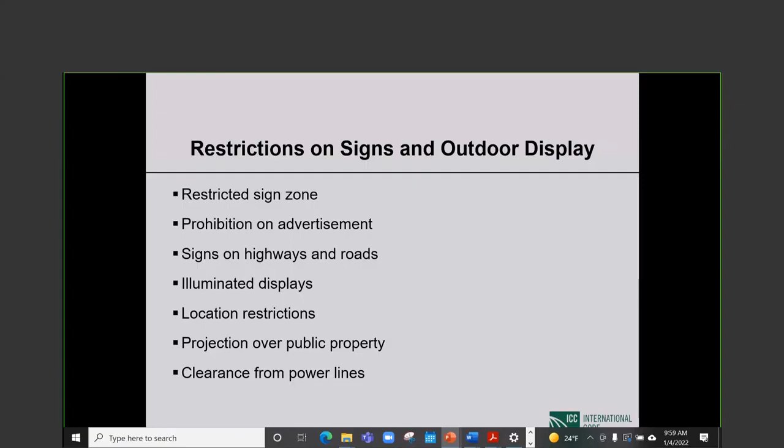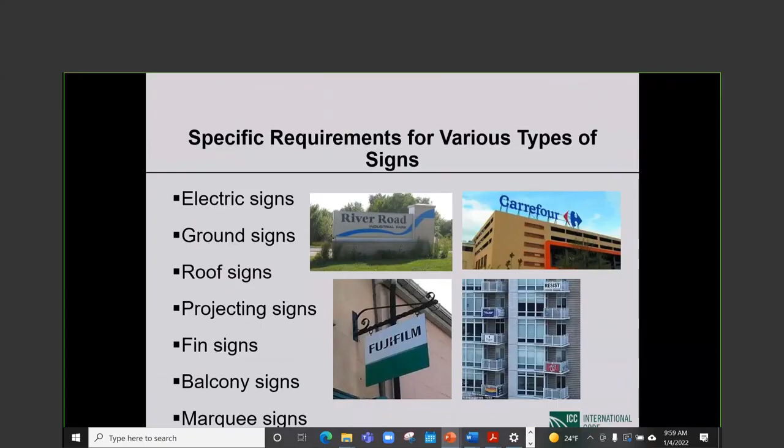Specific requirements for various types of signs are given in BNBC 2020: electric signs, ground signs, roof signs, projecting signs, fin signs—I don't even know what they are—balcony signs, marquee signs.

That brings us to an end. So again, the second part was material prepared by Dr. Rakib. I did make some modifications here and there. Dr. Rakib would have done it better, but under the circumstances, I thought I would do it.

I think we are early. Anyhow, we are open to questions. I hope Dr. Rakib is here—I would invite him to join in the answers. Bodhi, are there questions in the Q&A folder, or how do we proceed?

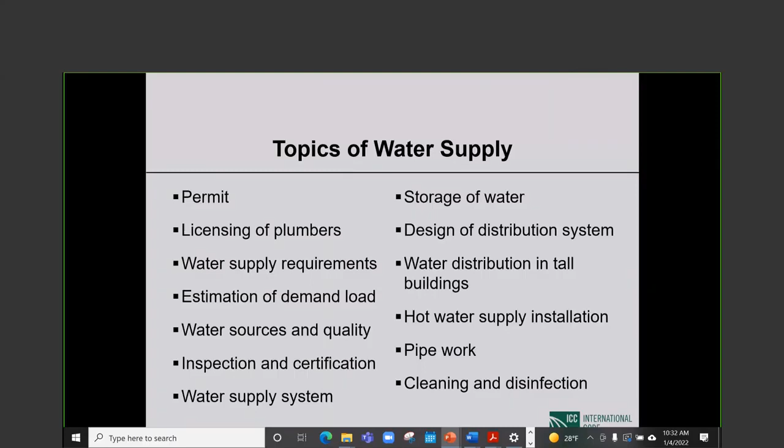Can you take me back? I don't know. Just press escape. No, it's not working somehow. Oh, okay. How do I know when it's slide 52? There is no slide number. Can't you press escape once? Okay. Well, this is 40 of 56. Okay. So I've gone too far.

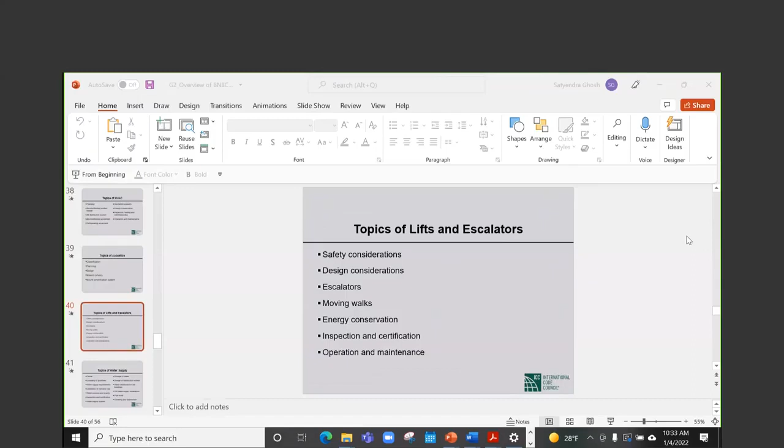So what's the question? Is it total floor area or each floor area considered in case of categorization of buildings to be supervised or designed in BNBC 2020? No, put this one in the category of we will post an answer, because I don't want to answer without looking at the provisions. Dr. Rakib might know, but I don't. I don't deal with the fire related provisions. Okay.

So I think the next question is also something Dr. Rakib will answer easily. In BNBC 2020, how much live load is considered for a mosque? I did not get it in the live load tables. Let me see if I can easily find it. Yeah, I probably can find it, but it will be easier to post it. Okay.